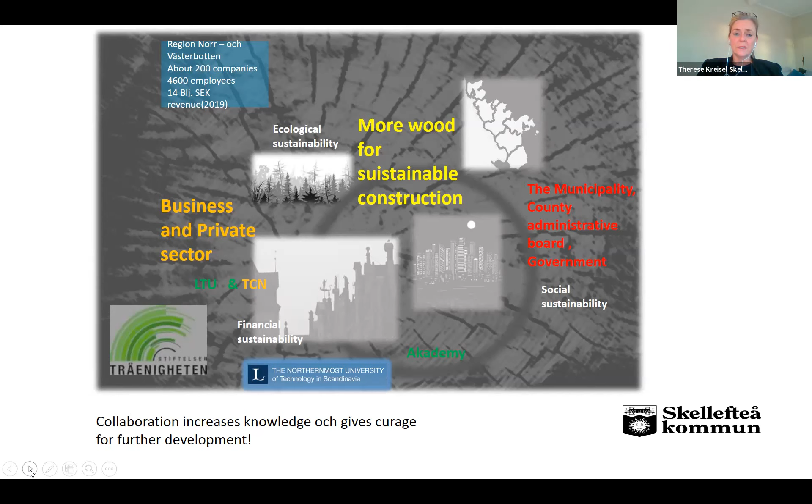To show you just about how we see this built together as one picture, we see it as a triangular way of working, where more knowledge and also the surfaces between the encounter of different fields will give you more knowledge. It's a collaboration, and it gives us courage to further development.

This is one good example of another public function in Skellefteå. It's the longest pedestrian and bike bridge in Europe, as a hanging bridge, and it also gives data every minute. It hangs there about how it collaborates with humidity and temperature and so on, and sends the data to the campus. So this is building our encouragement, building knowledge every day since 2004, I would say.

How do we look upon the wooden construction strategy and how we work with it in the public? We see it, as said before, we place it within urban planning and architecture and the design of architecture. And we see it as a collaboration of human senses. It's based on our human ability, and it's how we actually read our environment that we have to act on and from.

Wood is used a lot in Sweden, not only in the north, but particularly in the north. We have a lot of old buildings as well in wood, and it actually gives identity, and it builds and it creates a natural environment, because it makes you orientate when you see something familiar, and it gives you a place at mind also.

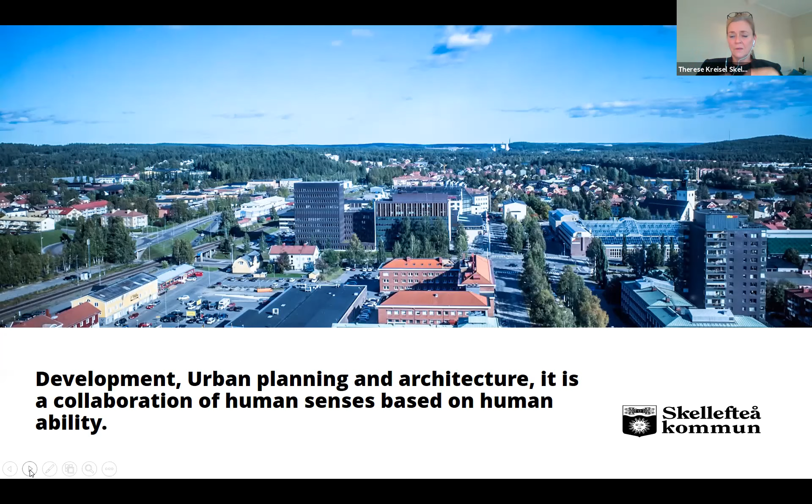And as we do that, we try as much as possible, and we do it with a focus on the human habitat. We do it with a focus on the human capacity of the brain and the senses connected. And also that we want to create a good human habitat. We want to also, as a part of a development strategy that we have, attract more people into our city.

So you could say that society is actually the main focus for us when it comes to the wood construction strategy, and being part of that long run strategy that we have to not only survive but also to develop. Sara Kulturhus, which you will later hear about, was part of that very strategy, because cultural events and meetings will make people grow and develop.

And so Sara is not only a symbol for the wooden strategy, it is actually a symbol also for the will to grow and to develop, because we are putting culture in the middle of the city.

We could also say that, yes, this is a part - we want to save the world. It indicates a healthy development, but at the same time, it creates a good base for growing and for economy. And I think it's very important, and for our politicians, it's very, very important to have a good base, not only to be sustainable, but it has to be sustainable in all three corners, in society, in climate, and in economy.

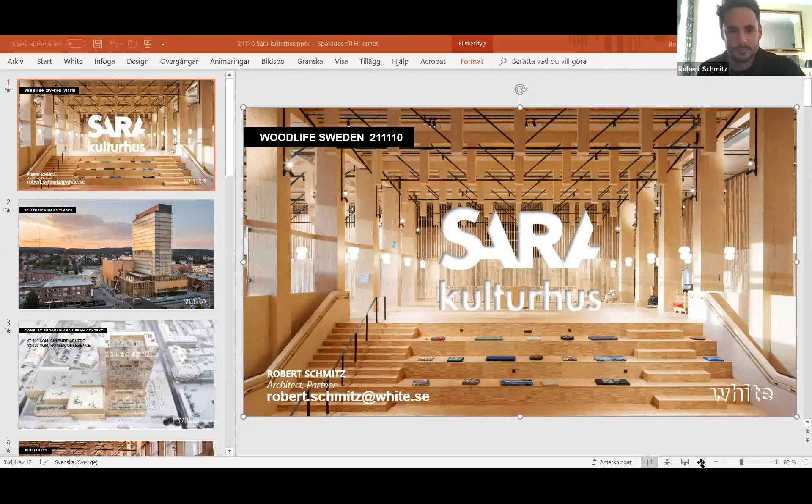I'm going to share the screen, in full mode. Thank you, Therese, for showing Skellefteå and explaining the power and will of how a municipality or the public sector can push this transition towards a more sustainable approach, and to build more sustainably. I'm going to give you today an example of that and the result of the modern timber strategy that the city of Skellefteå has achieved.

Sara Kulturhus started for us in 2015 as a competition launched by the municipality. The reason they wanted this culture center was to attract people to the city center and make the entire region more attractive, growing from 70,000 to 90,000 inhabitants over a number of years. So through culture, they wanted to redefine the city, and it's the start of a revitalization process that will change the entire city.

We are standing in the main foyer, and as you're probably guessing, I'm going to focus on timber, which has been our strategy through the entire design process. How far can we go working with timber? The program from the competition was that the culture center itself should be a brave culture center in its content, working with collaboration and enhancing the different culture operations within. So we said, okay, this is going to be brave.

The site is the most central plot in the city, located just between the main square and the future train station, the travel center. Before the culture center came here, this plot was used as a bus station.

It's quite narrow and long, but the program fills the entire plot. It's 17,000 square meters of culture center, including 6 stages for performing arts, ranging from 1,200 down to 80 people.

We have the Museum Anna Nordlander, an art gallery, the city library, and different backstage production areas like a forge and carpentry. In the high rise, we have the hotel with 3 different restaurants and a spa on top.

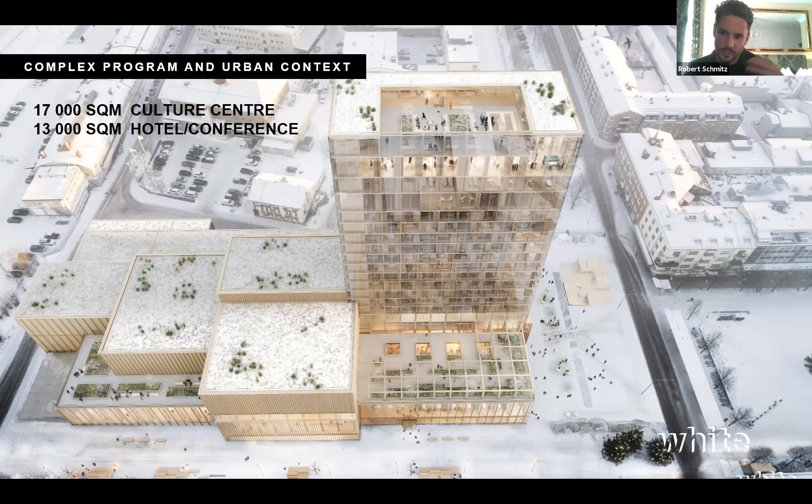The spa with a pool, with an infinity pool on top, was the last thing that was added in the program. We have been working with extending the program throughout the entire production and design phase.

This building is, of course, tailored to fit its purpose, but it is also made for flexibility. We didn't want to define the spaces as a certain role.

We want to make beautiful spaces that people can connect to and adapt, like here in the foyer where the local dance company does their rehearsals instead of in the backstage areas. That's also a sustainable approach, that we want the entire building to become alive and be used and utilized by the people of Skellefteå.

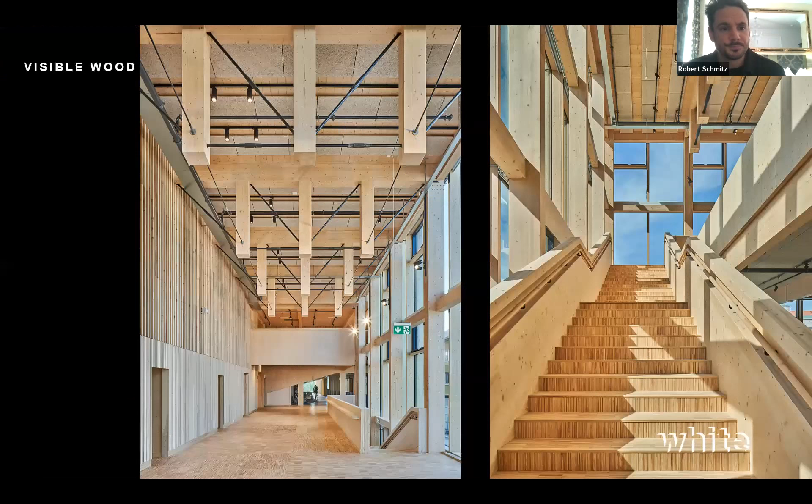Throughout the building, we wanted to expose the timber and use that as a guidance running through the building. For example, we have these trusses that we are having as ornamentation, but also filling their function with the long spans that they're providing in the ceiling.

This makes an example of our methodology where we're talking about material optimization. Here we have the timber taking the pressure, as it's best at, but then we have the steel taking tension, so that we have this character of the room.

The different public floors are connected through a number of staircases so that they can be disconnected or working independently side by side, or working together, which is also an idea of this building - we want to have collaboration and thinking, and that's generated to make new ideas.

In the center of the plot, or complex, there lies the grand auditorium, or stage 1 as we call it. It has 1,200 seats, and it has retractable seats, so we can go up to 1,500, and it's up and running.

I think it's been sold out almost every night since it opened. And this is me, but I didn't get sold out, sorry. I didn't have any audience. Hopefully I have more audience here.

This created a library of solutions since it's tailored and fills so many functions in the building. We have a number of different technical solutions for how we solved these problems. For example, we have 27 different types of outer walls.

As you can see, from ground up, the building is entirely made in timber with glulam columns and beams, and shear walls of CLT. The high-rise consists of pre-manufactured 3D CLT modules stacked for 13 stories between two stabilizing cores in CLT as well, reaching 20 stories up.

At the top, we had to use some concrete for the two top floors just to prevent the building, since the material is so light, from swaying too much, so you don't get seasick while being up there or sleeping in your hotel room.

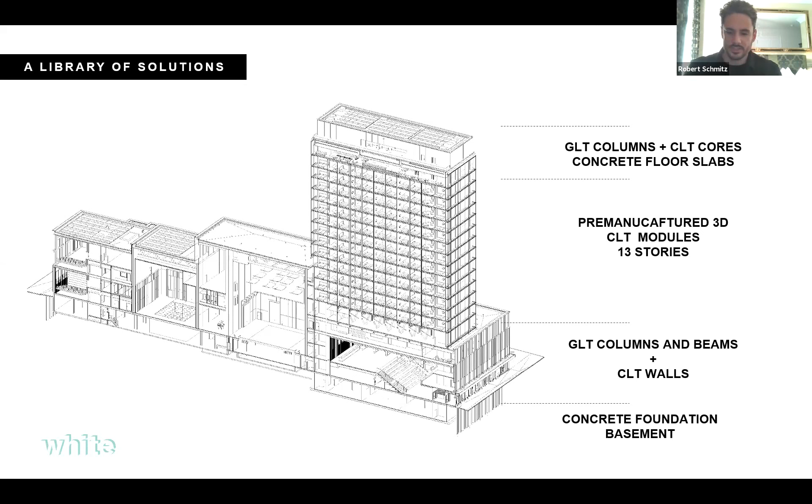Then, of course, we have concrete foundation, and we also have a cellar underneath the high rise. It's a small part of the entire footprint.

For the hotel modules, to gain time and save time in production, we learned that we did them as 3D modules in a factory just outside of Skellefteå. The entire building is from locally sourced spruce, harvested in a radius of about 100 kilometers around Skellefteå.

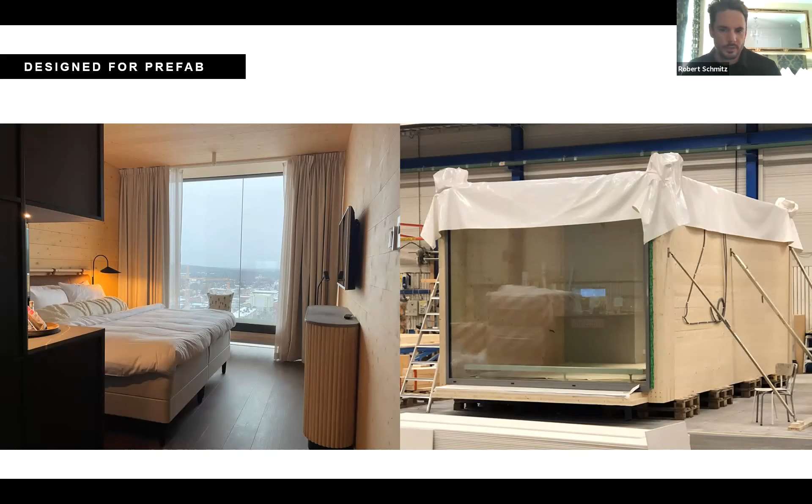The spruce went into the sawmill, where they produced the CLT boards, which were then transported to the factory, about 50 kilometers outside of Skellefteå, where they were mounted and assembled in a safe environment, and then transported back to the construction site and lifted on site in the end. From your right side, you see the first module, and then the result on the opening day.

I think I took this picture, and this allows for a fantastic view with a glazed window towards the city, overlooking the city and the river of Skellefteå.

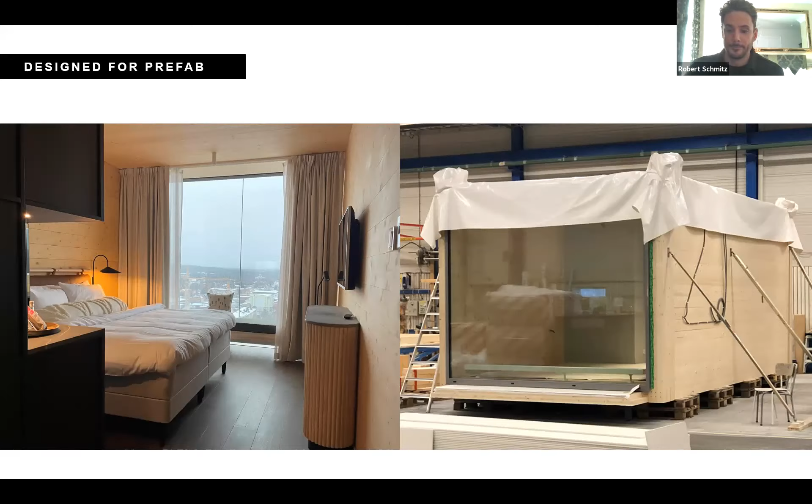Here you can see the exposed CLT walls and CLT ceiling, and that's what holds the module together. And here we have an image illustrating how they are stacked on top of each other. So the construction site becomes not construction, it's more an assembly with carpenters just taking these pre-manufactured modules out and putting them on site.

And in this way we saved about a year in construction time. The method of doing building like this gets really fast, and the record was half a floor a day, but it was a little bit wind sensitive, this process.

We also worked with digital design in order to be able to really interact with all the stakeholders and knowledge sharing. We used BIM, Revit, where we could do simulations and work with sustainability factors. We worked with VR and visualizations to...

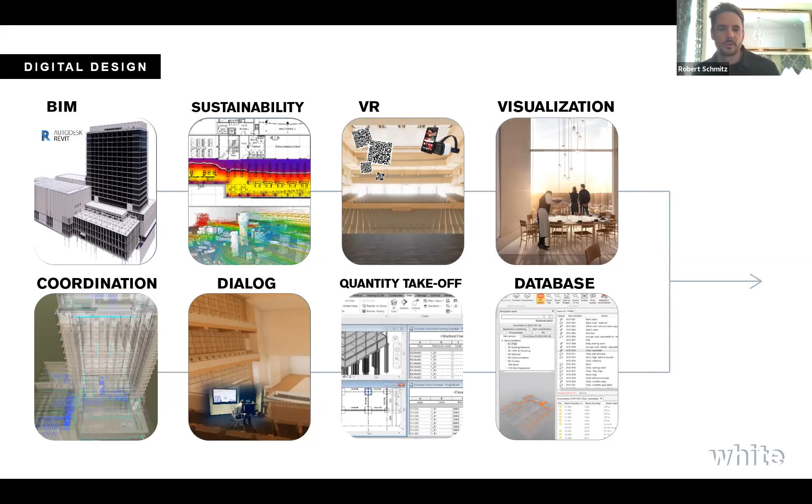get the client to an understanding of what we were doing, but also everyone to really see, because we're using so much construction timber, it was important for everyone to understand that there was a reason why we needed to be very careful with the timber.

We have done an LCA, a climate analysis report of the project. It shows that within 50 years, this building will be climate positive, carbon negative. It will sequester almost twice as much carbon in the building and in the timber than the embodied carbon used for production. And here is the last image of a sustainable future in the timber city of Skellefteå.

Thank you for the lovely introduction. I'm just going to share my screen. Sorry. We see the presentation, maybe full screen. Okay, alright. So today I think I'm going to use Therese's 3 minutes and Robert's 2 minutes also. I will try to talk short. But so you owe them a coffee later on. Yeah, of course.

Unlike many presentations that I've made in the last couple of years, I decided not to talk about architecture today. It doesn't take it very long, and it also gets boring at some point. So I will try instead to put some emphasis on the users a little bit. I will talk about 2 cases that we have been involved in for the last couple of years.

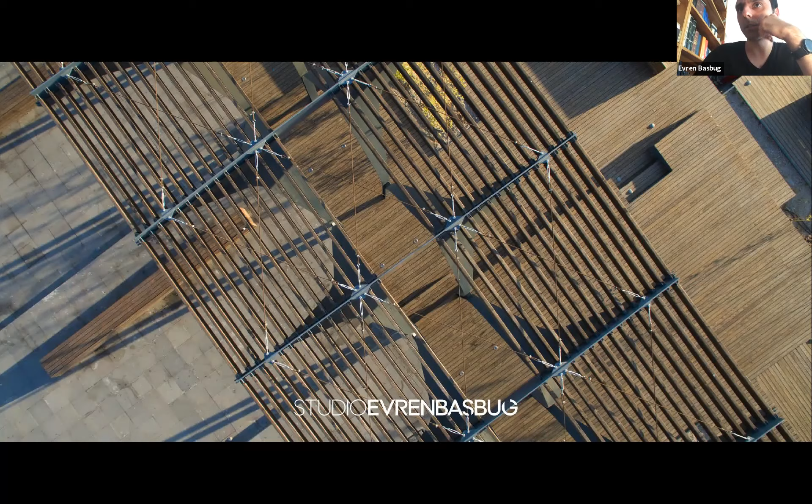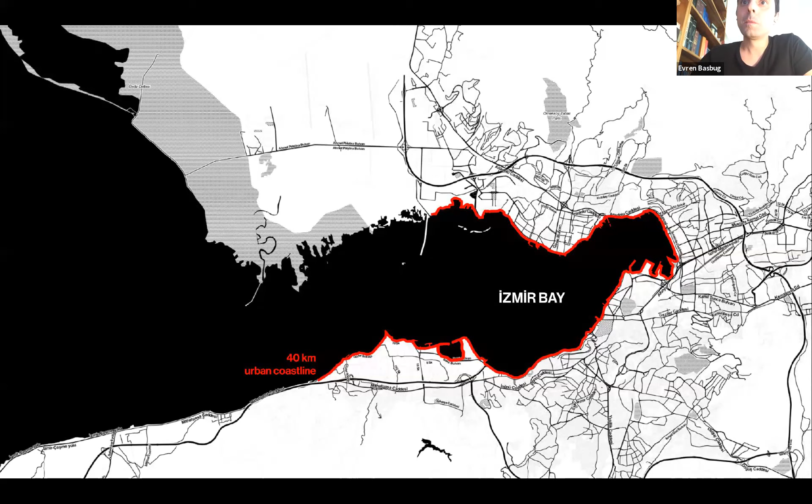From 2012 to 2019, for approximately 7 years, we have been involved in an ambitious urban regeneration project, which we worked on — a 40 kilometers long urban coastline of Izmir, one of the most unique cities in the western region of Turkey. Our office was the leading team for a multidisciplinary group of professionals, responsible for the development, design and regeneration of the northern coast of this metropolitan bay area.

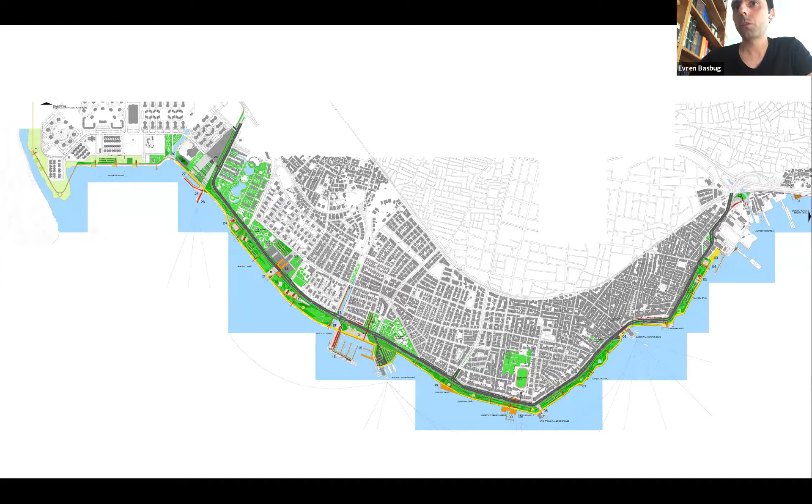For the first stage of the project, we developed a master plan, and then we designed multiple interventions on this master plan. In the last couple of years, several of these projects have been constructed, which you can see with the green tag here, and many others are in line also. But I can easily say that the majority of the northern coastline has been regenerated today.

Today, after briefly talking about the design ideas behind these 2 projects, I will just show a couple of photographs of each of them, which are in close proximity with each other, actually. The Bostanlı Footbridge and Sunset Lounge, which you see at the left, and the Pavilion by the Sea, which is on the right.

Of course, in line with the theme of this symposium, I chose these two projects with regard to the use of timber, as you may have guessed. But instead of trying to emphasize the design features and material details, I would like to point out the influential impact of these projects at the end for the users.

Our design decisions of the master plan stage were very much related with the unique lifestyle of Izmir. The city today has around 4.5 million inhabitants. Unlike any other metropolis with this size, Izmir has a really laid back and relaxed way of life, especially in hot summertime. You may almost feel that you're living in a holiday resort or something. This is somehow related to the rhythm of the daily life in the city. Actually, everyone and everything moves really slow in the city. People always have lots of time, and they won't ever hurry for anything, as if they want to enjoy every second of their lives. And most of the time they seem really happy.

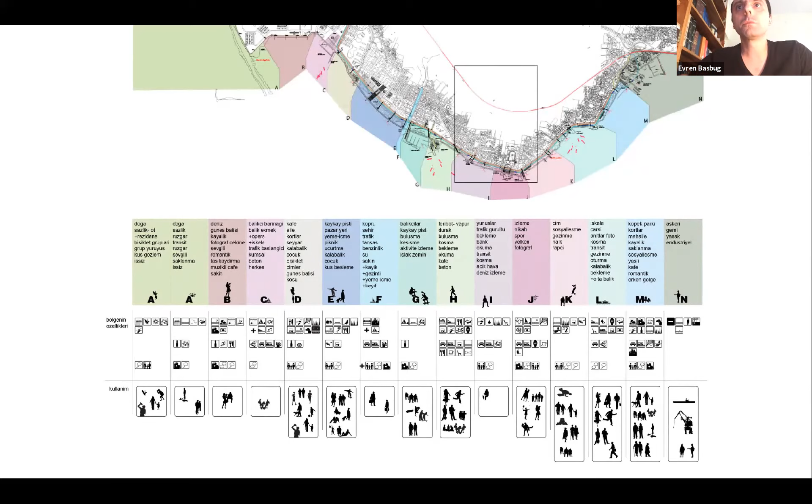What we did with the master plan stage was to basically analyze the existing situation on this very active urban public space and to improve its physical qualities regarding to the already existing user behaviors. So while doing this, we tried to experiment on the possibilities of the section to diversify the everyday shoreline experience.

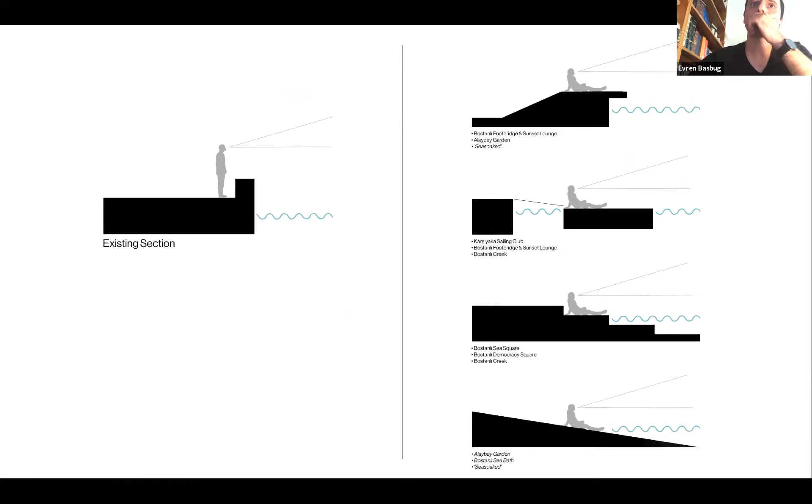and the sunset viewing lounge adjacent to it. Both functions were somehow in line with the unique lifestyle of Izmir and the experiences of users.

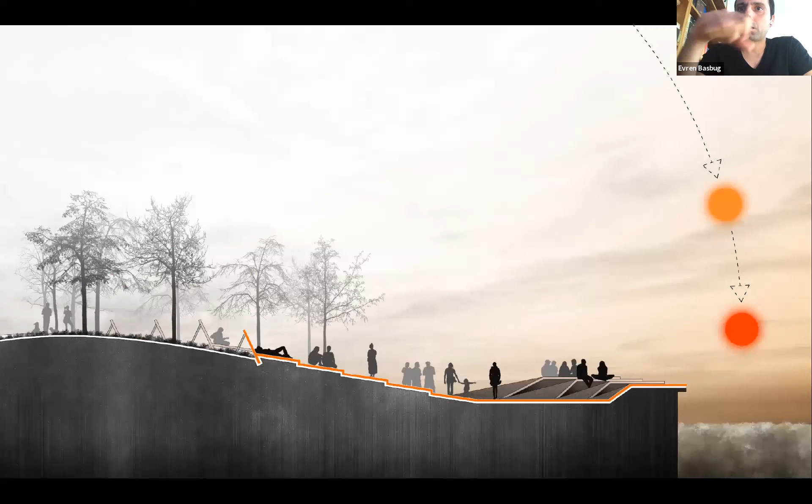I mean, the local authority was somehow skeptical about this viewing the sunset function at first, but later on the idea grew on them too.

Since it is also a space for observing celestial bodies, I mean, it can be considered as an outdoor version of a planetarium for me, at least.

I certainly remember that in one of my interviews for an architectural magazine, I mentioned the phrase, a public space which makes you feel like you're in your living room. It's I think a nice coincidence with the theme of this panel, or maybe it's the reason that I'm one of the panelists here today.

Of course, the use of thermally modified wood as a material has a huge role in this living room-like experience, I believe.

The space itself provides different kinds of experiences for different types of users. In time, the location certainly evolved into an interesting gathering point for groups of people as a space for idleness, I call it.

However, it also serves as a space for contemplation too. I mean, this is somehow a hybrid state which allows one to stay alone while at the same time letting him or her to be a part of the crowd also.

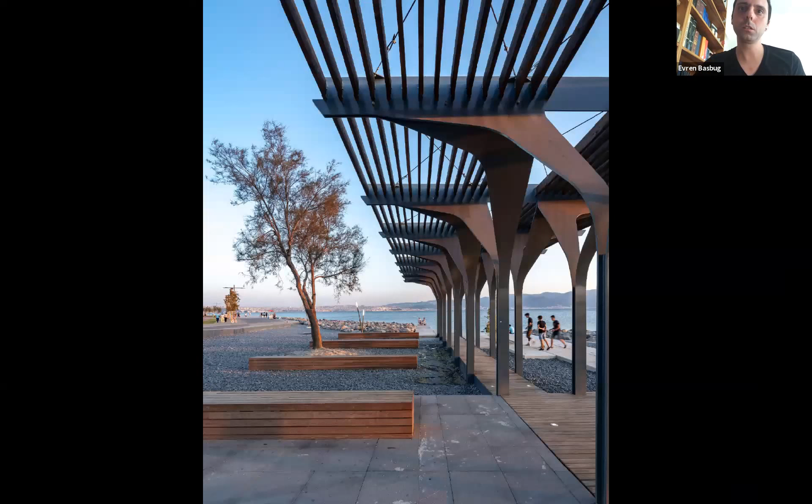As you can see, it's a steel canopy structure with wooden shades. We designed this structure above a series of cascading wooden platforms. Although the material emphasis on this intervention seems to be the steel this time, I think timber still plays a major role

a major role on the spatial quality of the public space. Like the Sunset Lounge, the location is nowadays in high demand, also among citizens. But unlike Sunset Lounge and its mostly casual use, people also come here for a set of predefined activities, which makes it different from the other project.

For example, sometimes musicians gather here for rehearsals, or every morning and afternoon, groups of people use the cascading platforms for their daily yoga or meditation exercises.

I believe that even a minor change in the quality of the public space can make a huge difference in the lives of people in cities. And sometimes the contribution of the material is really crucial for this impact.

After the official opening of the Bostanlı Sunset Lounge in the summer of 2016, we made a small-scale social media scan to see the impact of our intervention in the daily lives of people.

I remember it was a time when the whole country, Turkey, was politically polarized, and everyone, regardless of their age, gender, political orientation, was really so tense. Everyone was fighting everywhere, not in actual fighting, but like in social media.